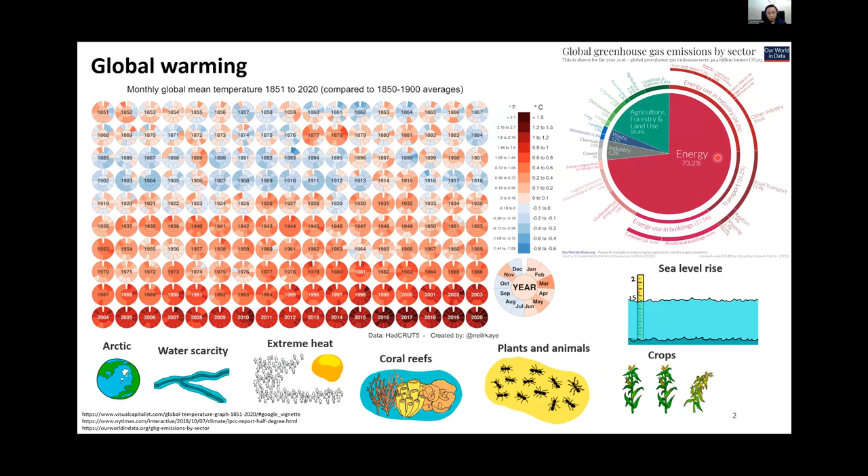And this picture shows the contributors to greenhouse gas emission. So more than 70% of emissions are from the energy sector. So decarbonization in the energy sector is taking a heavy burden. Renewable energy is an ultimate solution for global warming, and 29% of Europe's electricity is from renewable energy. And the EU is aiming to increase it to 43% by 2030.

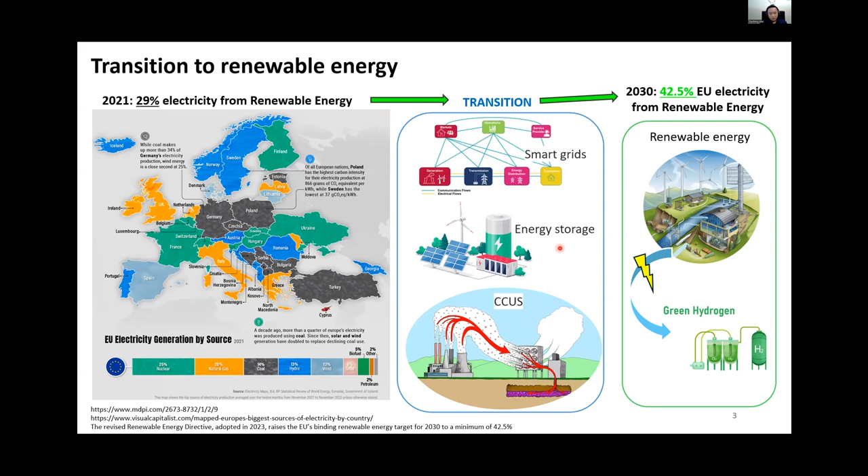So during this transition to a renewable world, clean technologies like smart grids, energy storage, and carbon capture, utilization and storage, or CCUS, are emerging. But combining CCUS and renewable energy can gain negative emission, in addition to clean energy. This project, CLG-G3BioF, is such a project which combines CCS and renewable energy, because it uses CLG to generate syngas and at the same time capture CO2. And this project also uses microalgae as the renewable energy source.

Now here is the logo of this project, and this project is a 2-year European postdoc fellowship project. And for those who may want to know, the fellowship's objectives are to support researchers' careers and to foster excellence in research. This picture describes the process of CLG for the third generation biofuel production. The central part is CLG, which I will talk about in the next slide.

And the project has advantages of combining CCS and bioenergy generation. It can help to gain negative CO2 emissions, and it can help to generate high purity syngas without lots of dilution by nitrogen. And with this process, there is a very low risk of heat exchanger corrosion, and the system can operate under autothermal conditions, but with the absence of oxygen. And tar formation in the process can be hugely suppressed.

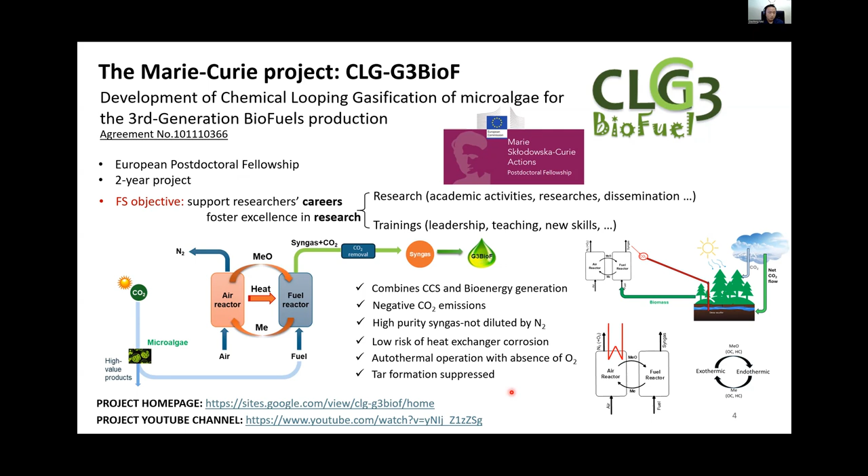Before talking about CLG, I want to introduce first chemical looping combustion, or CLC. CLC has two reactors and oxygen carriers that circulate between the reactors to transfer oxygen. So in the air reactor, oxygen carriers take up oxygen from the air, and in the fuel reactor, the oxygen carrier provides oxygen for fuel combustion. So air and fuel are never mixed in the CLC process, and fuel reactor gases are only CO2 and steam. The CO2 is easy to capture after simple condensation.

CLC happens when the overall oxygen to fuel ratio, that is lambda, is higher than 1. And when lambda is lower than 1, CLC is changed to the CLG process. So CLG gasifies the fuel to syngas, which is then subject to CO2 removal and purification. And the purified syngas is an important precursor for many industrial syntheses, like biofuel generation.

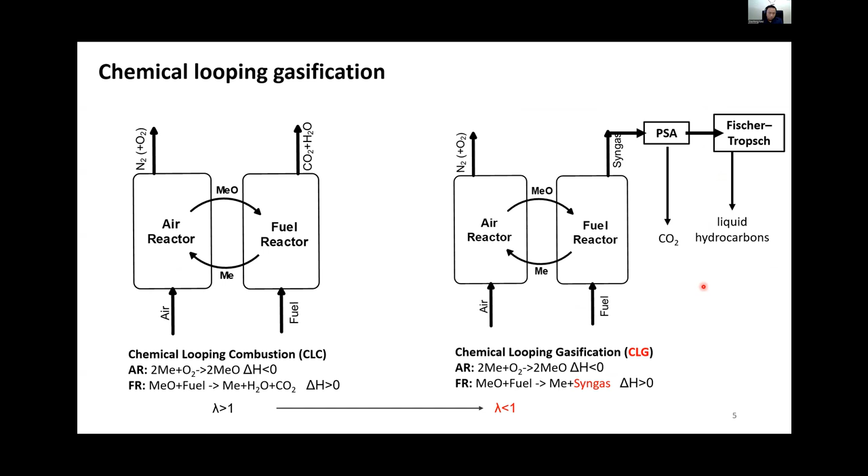So in addition to the current CLG G3 BIOF project, other recent projects on CLC and CLG I would like to mention include the CHEERS project and the CLARA project. The CHEERS project is about chemical looping combustion, and the CLARA project is about CLG, chemical looping gasification. Both projects ended last year, and we also have a new project on CLC, called Bio-Flex CLC. It already started in June this year, and another project on CLG, which Paco just mentioned, is called Bio-MegaFuel.

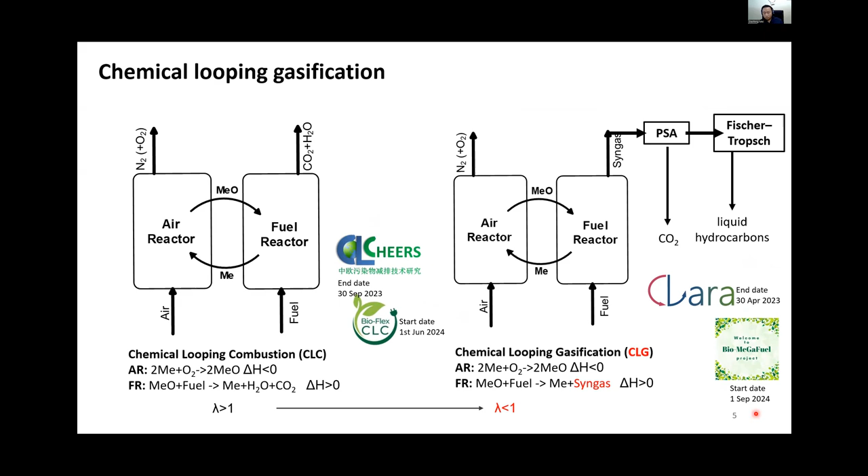So it started at the beginning of this month. This project has 4 work packages. The first one is oxygen carrier selection. The second is proof of concept. The third is the process simulation. And the fourth is life cycle analysis.

In the first work package, we're going to use a 2-step selection to select suitable oxygen carriers. The first selection is to use the batch reactor to select some candidates. For the second step, we will do a further selection with a 1.5 kilowatt pilot in our group.

In the second work package, I want to do some experiments with the 50 kilowatt unit in the lab to prove the concept. And in the third one, we will do some process simulation, which is also called the power of silence, to explore the opportunities and challenges when integrating the CLG-G3BioF to upstream and downstream processes.

The last work package is to do life cycle analysis of all the stuff involved in the process. Maybe not only the process, but all the upstream and downstream processes. From cradle to grave, and not only from cradle to grave, but maybe also from cradle to cradle.

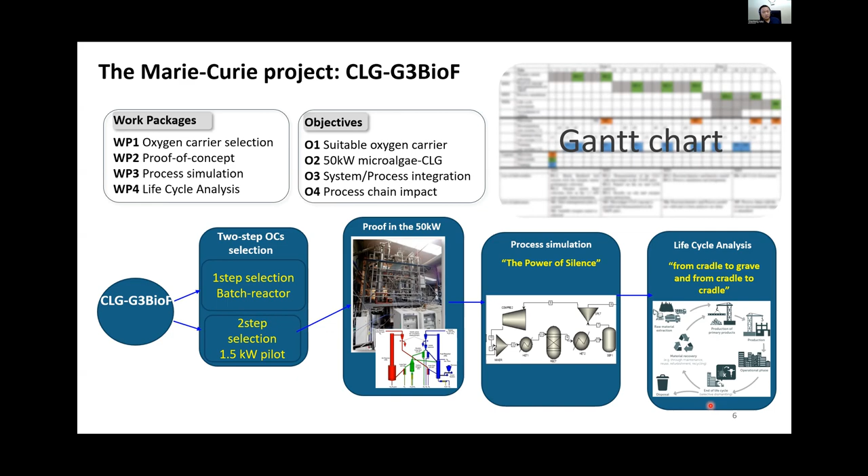One question maybe some people want to ask: why do you use microalgae? There are possibly many answers. Here are just my thoughts I would like to share. First, because microalgae are biomass, when used in the CLG process it means it has negative emissions. And microalgae grow 30 times faster than other biomasses, and also they use much less land and water than other plants or crops.

The third is that microalgae have no competition with the food chain, and also have high value products extraction. For example, after lipids extraction, the residue from microalgae is also biomass. So we can use microalgae and also the residue from the microalgae. And microalgae can also be used in wastewater treatment. This is just one example, and it can also be used in other processes. So this can open an opportunity for us to integrate with other processes.

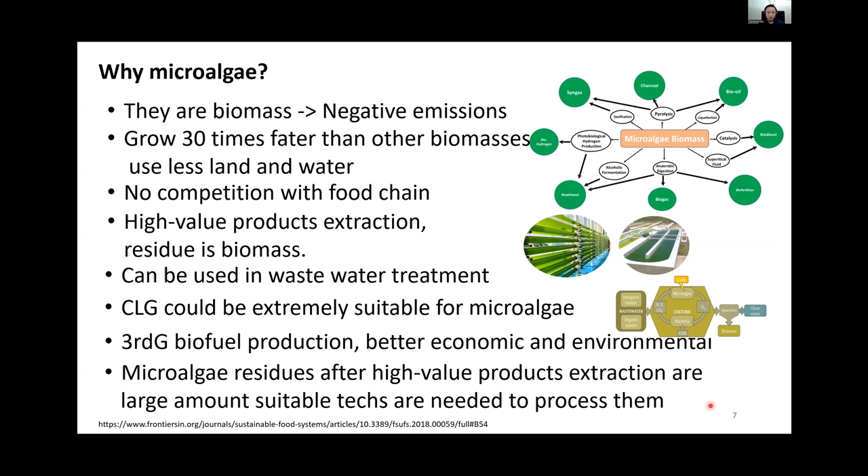With this project, now I want to start to share what we have done. The first thing we've done is the first step, oxygen carrier selection, which is designed for the first work package, and the second is the TGA experiments for kinetics of char gasification. We got some data.

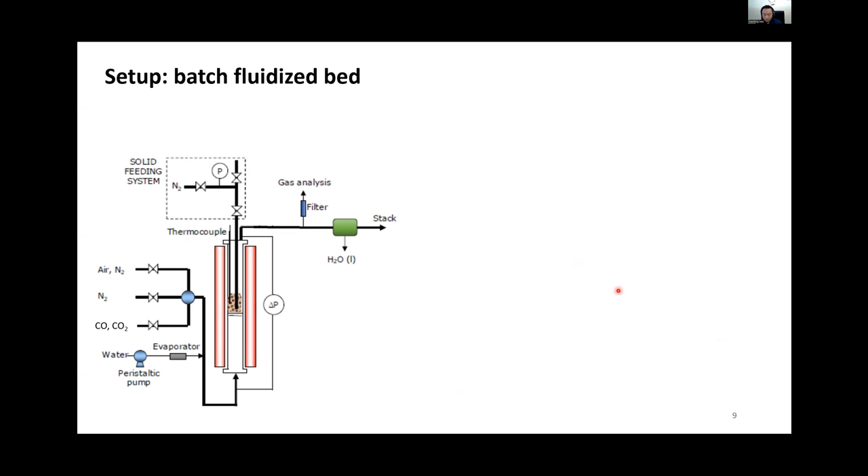So we used the batch fluidized bed to test the oxygen carrier candidates. The batch fluidized bed has a gas preparation system, a high temperature steel reactor tube, a fuel feeding system, and a gas analyzer system. The microalgae are from Brazil, but when they are received, they are fines or powders smaller than 10 microns. This is a problem, we cannot use this powder in our system. So before we use it, we granulate it with a granulator and sieve to 200 to 400 microns.

And we can see in this table, the algae has 63% volatiles and 11% fixed carbon. And for each test, we use 2 grams of microalgae.

We use ilmenite, manganese ore, which is called MNGB, LD slag, and iron sand as the oxygen carrier candidates. The ilmenite is an iron titanium ore, and the manganese ore is a manganese iron ore, while the LD slag and iron sand are industrial byproducts. And zirconia is also used as inert, either mixing with the oxygen carriers or just as bed for blank tests.

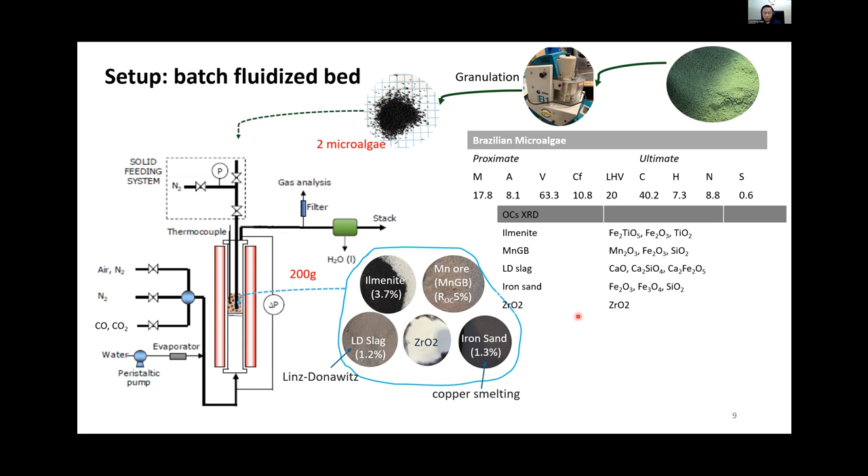One question here is, when we use an oxygen carrier in CLG, the oxygen carrier can be reduced to different degrees. And the different reduction degree usually means a difference in oxygen carrier reactivity. The difference in reactivity, however, could lead to different rates in gasification, and so the gas distribution and yield may be different. With this in mind, we designed an experiment matrix as seen in this table.

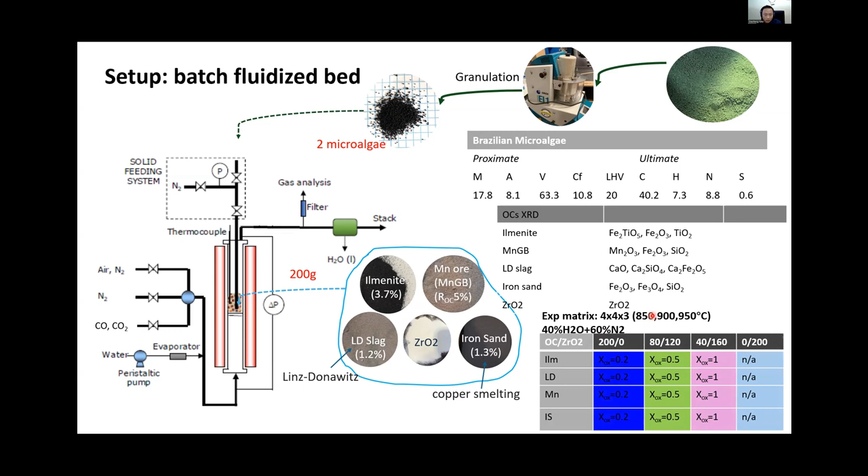So the oxygen carriers are mixed with zirconia, but were reduced to 0.2 or 0.5 to maintain the available oxygen in the bed. This is to rule out the effect of available oxygen in the bed. And three temperatures, 850, 900, and 950, were used in the tests.

Here is a typical cycle, and this typical cycle has a first CO reduction, and then oxidation, and the second CO reduction, and then gasification, and then the oxidation. The first CO reduction is to find a suitable time that can reduce the oxygen carrier to a certain reduction degree, or what we call oxidation degree. That means the degree of oxidation of the oxygen carrier.

And this table gives an example of the reached oxygen carrier conversion degree, which are very close to the desired value 0.2 and 0.5. The time found in the first CO reduction is then used in the second CO reduction to control the oxygen carrier conversion degree. A microalgae injection starts just after this second CO reduction.

And here, after a few injections, the volatiles release and char gasification happen, like this, and we divide the volatile release and char gasification by when the methane concentration ends. This is to facilitate the analysis of the volatile release and char gasification, these two steps.

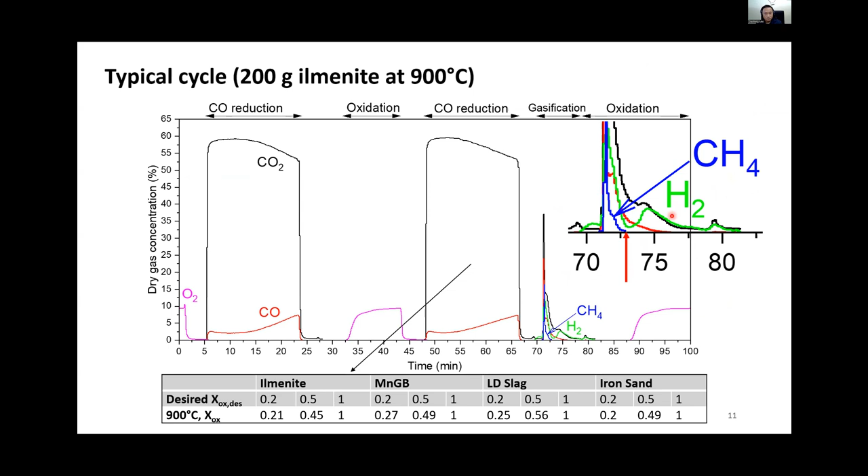So here come the gasification results. Figure A is an example of gasification with zirconia at 900 degrees C. The concentrations of CO2 and hydrogen are quite close. The similar CO2 and hydrogen concentration and the lower CO suggest that the water gas shift could be relevant. This means it could reach the water gas shift equilibrium. But this is expected because we use high steam concentration in the bed.

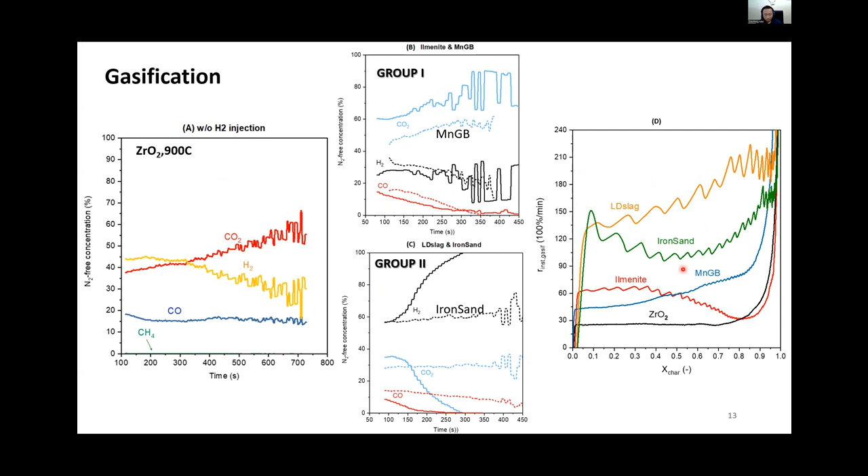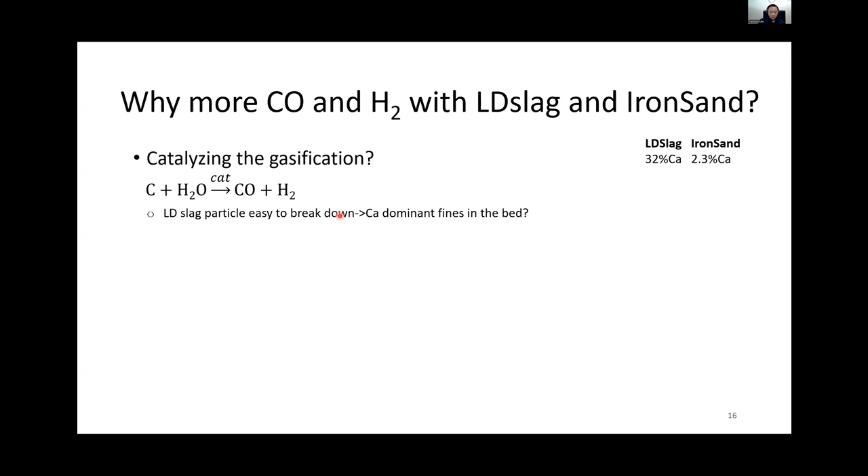One question may pop up: we found the CO and hydrogen is higher when we use LD slag and iron sand, and I want to know why this happens. One explanation could be calcium's catalysis on gasification. LD slag and iron sand have a significant amount of calcium. And actually, the LD slag particle is easy to break down, either in cold or hot condition. We find a lot of fines when we operate with LD slag.

So when it breaks, there's a chance to form maybe calcium-dominant particles or fines in the bed. And second, at high temperature, calcium may have better mobility and it can transfer to the oxygen carrier surface. So calcium may be on the oxygen carrier particle surface, but we probably also have kind of free calcium-dominant fines.

So in the fluidized bed, I mean, it's bubbling fluidized, not fast fluidized bed, the char particle can be immersed in the bed. It can have a chance to contact with the calcium, and then the gasification is enhanced. A second explanation can be the carbonation reaction. So this reaction, CO2 plus calcium oxide, we get calcium carbonate.

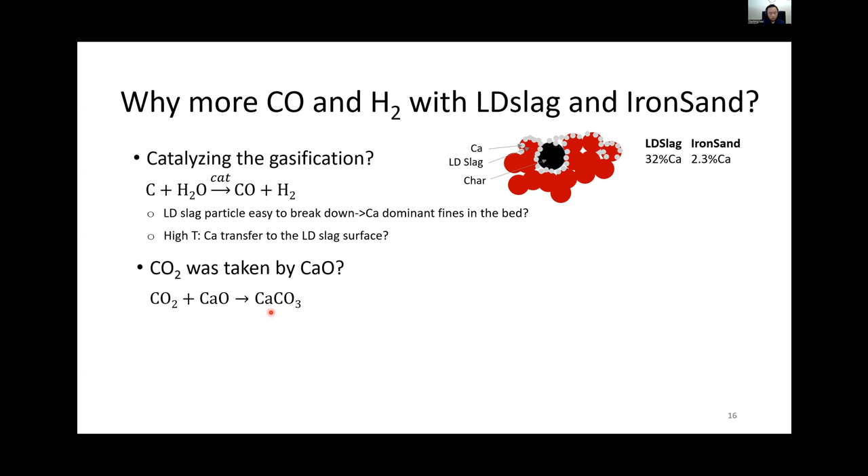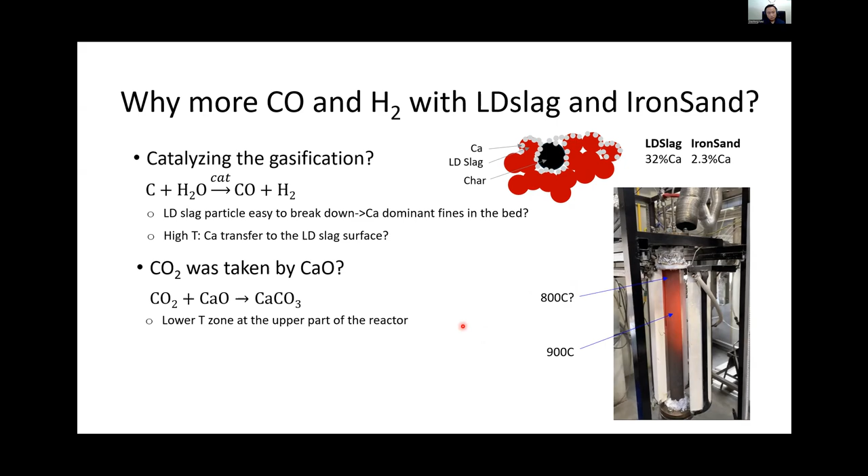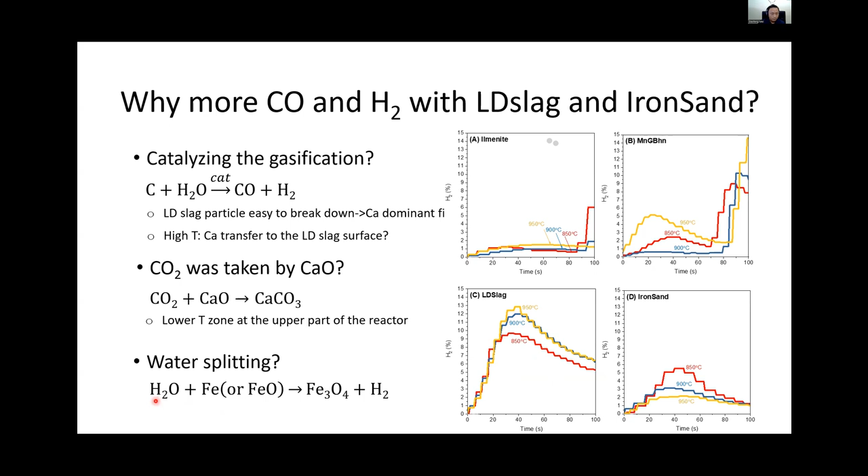A third could be the water splitting. This was found more relevant for LD slag. So you can see from these figures, LD slag and iron sand, when reduced oxygen carriers were exposed to steam before they start the fuel. Water splitting means steam plus iron, we get hydrogen. But anyway, LD slag and iron sand are promising to get faster gasification and higher gas yield. And so they are selected for the next step test for the project, a 1.5 kilowatt CLG pilot.

Another work I'm doing is the kinetics of char gasification, and this could be used in process simulation. In the CLG process, the char is generated rapidly when the fuel is fed at high temperature, so the char is so-called fast char. So we want to get intrinsic kinetics of fast char and use it in CLG process simulation, or maybe not only for this process simulation, but also for other models.

The fast char of the microalgae is prepared with this fluidized bed reactor. I put the algal particles in a wire basket and immersed it rapidly into the reactor. So the particle can be heated quickly and it devolatilizes quickly. You can see the flames because the volatiles are burned close to the exit of the reactor, because we have some oxygen on the top. But the reactor was still an inert environment at 950 degrees. After quick cooling down, we got a fast char. I crushed and sieved the char and used it in kinetics experiments.

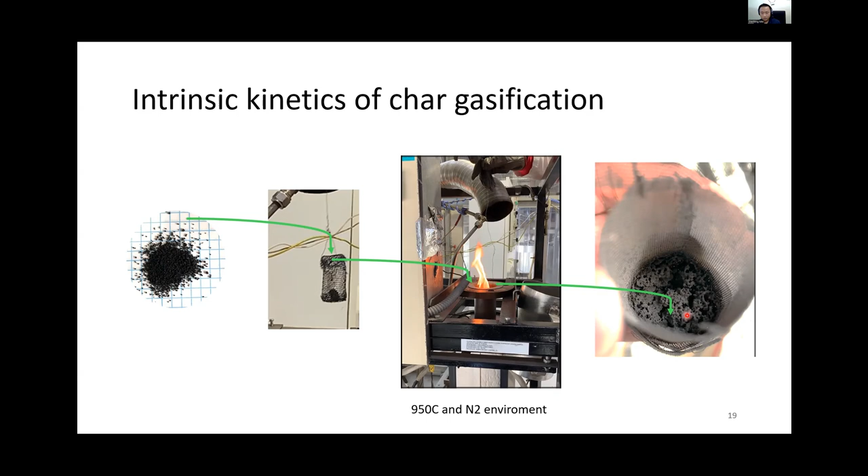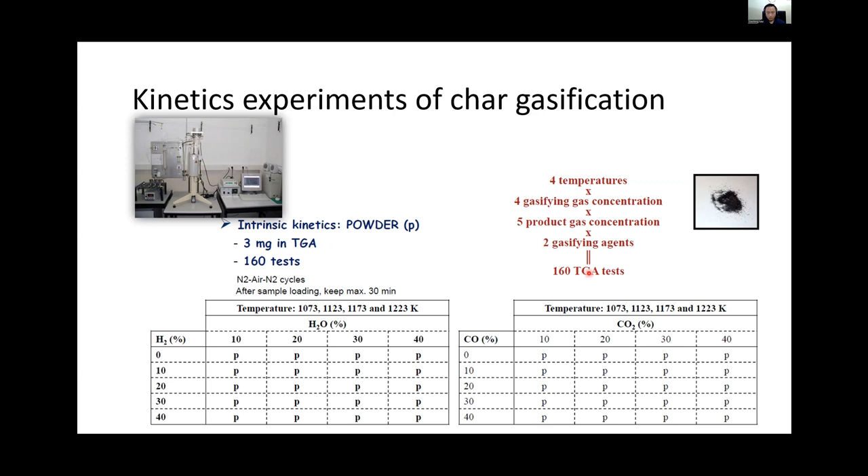The kinetics experiments of char gasification were done in TGA, and 3 milligram particles were dispersed in the TGA basket. A big matrix of TGA tests was made, and the effect of temperature, gasifying agent, steam concentration and CO2 concentration, and effect of hydrogen and CO products were all considered. So around 160 TGA tests were conducted. These two figures present an example of char conversion data, and the effect of steam concentration and hydrogen concentration can be clearly seen.

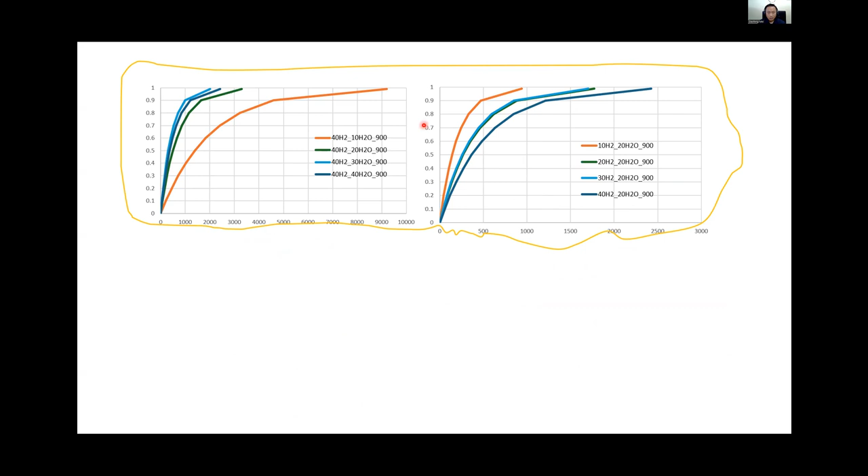And with this TGA data, we can get the Langmuir-Hinshelwood kinetics parameters, like apparent activation energy and pre-exponential factors. And we want to use these kinetics parameters to get an accurate process simulation model for the project.